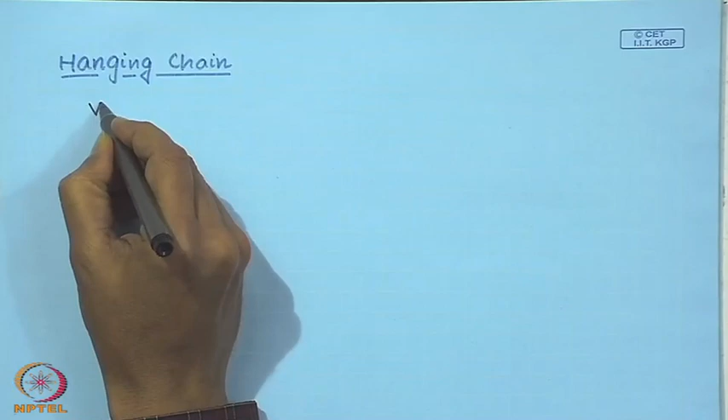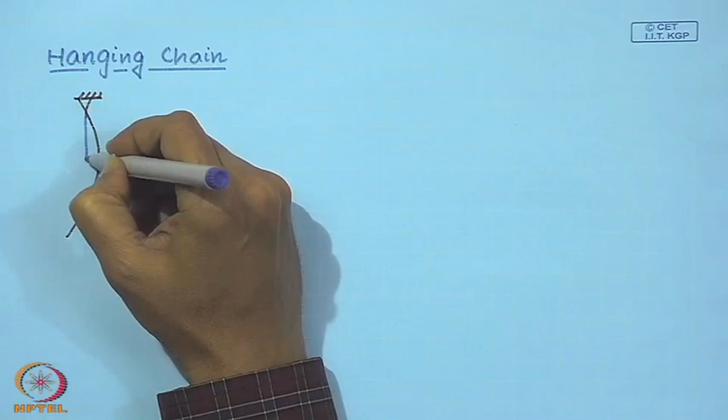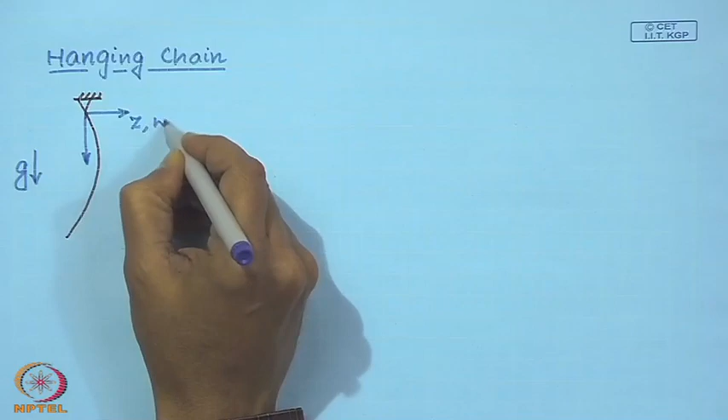So let us consider this chain hanging in a uniform gravitational field. We assume that this chain is made of a material of density rho, has a constant area of cross section A, and has a length L. Now, this is an inextensible chain.

Though it does not in a way resemble a string, which is an elastic continuum, a one dimensional elastic continuum, this is inextensible. Yet, as we will see very soon, the equation of motion, at least up to the linear order, is similar to that of a string.

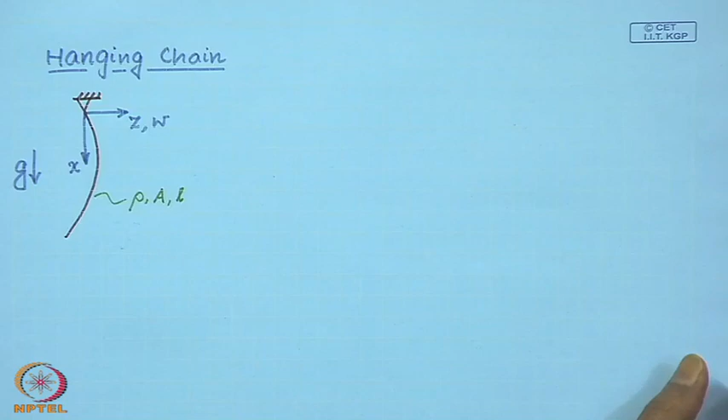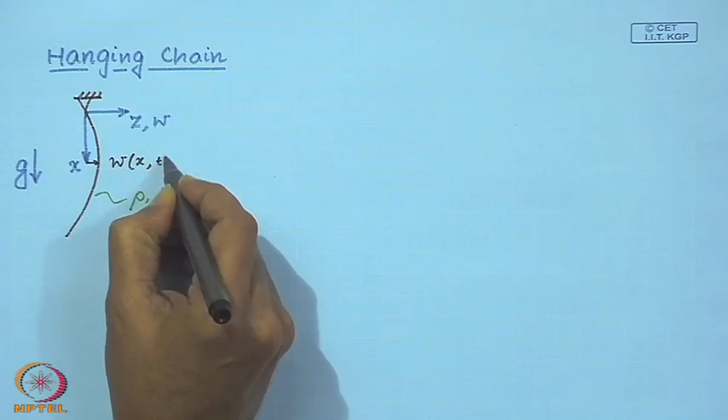So we are going to write down the energy expressions, starting with the kinetic energy. At any location x, our field variable is W(x,t). The kinetic energy of an infinitesimal element can be written as...

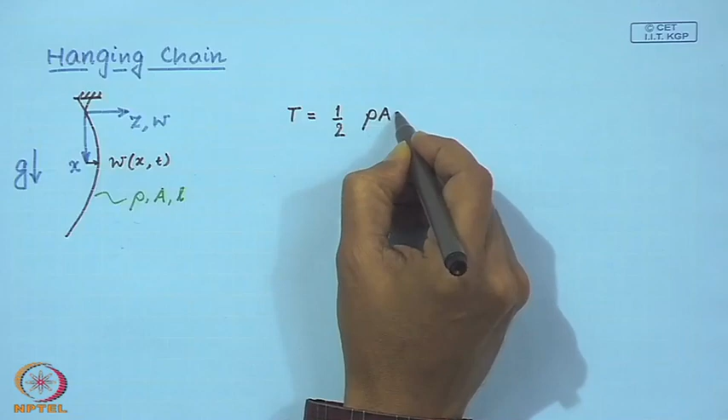half rho A dx, which is the mass of the infinitesimal element, times velocity squared. If I integrate this over the length of the string, then what I have is the kinetic energy.

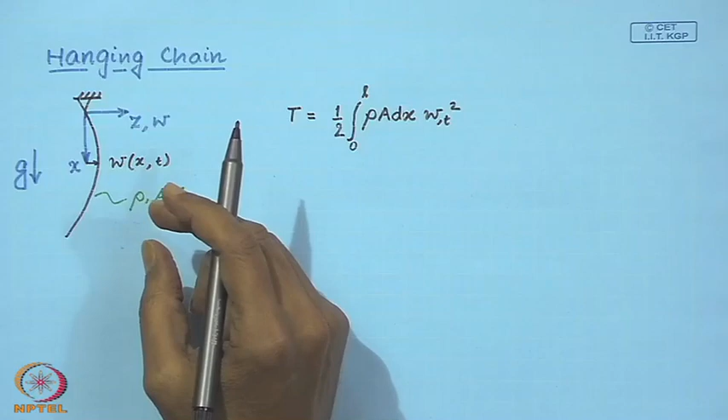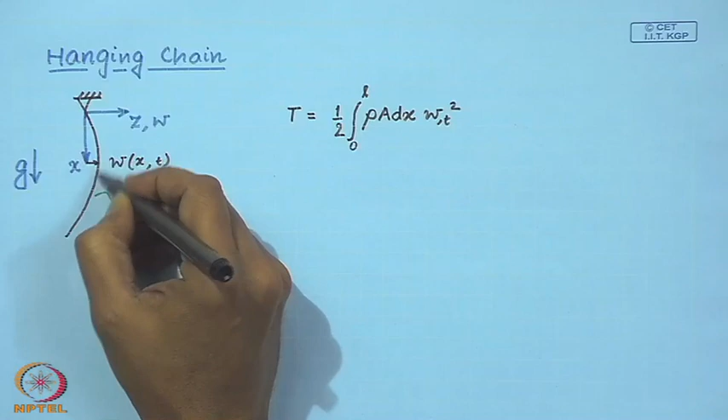Now the potential energy of this chain. Why does this chain restore back to its vertical position? It is because as it deflects or is disturbed, the potential energy of the chain changes, it increases. To calculate that, let us look at a small element of this chain.

This is the undeformed configuration of the chain, and this is the deflected configuration. This infinitesimal element had a length dx.

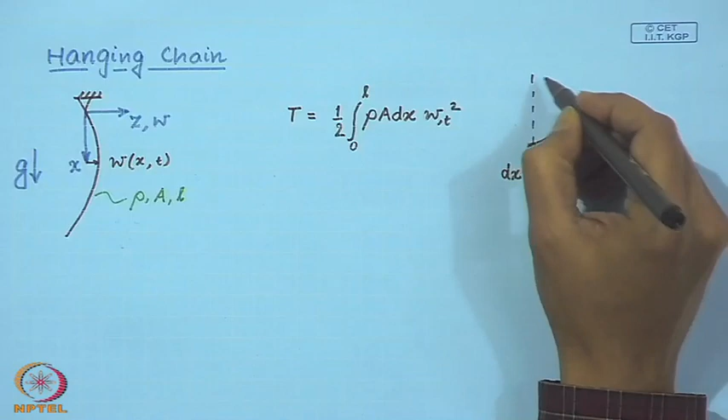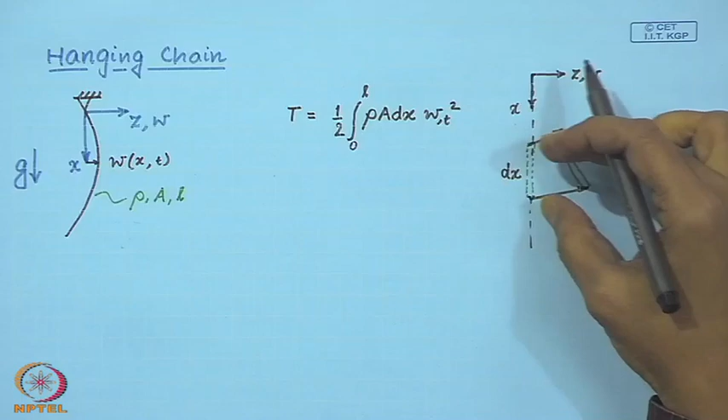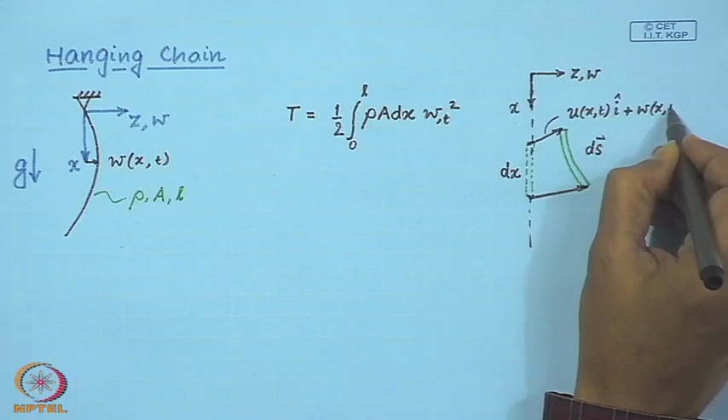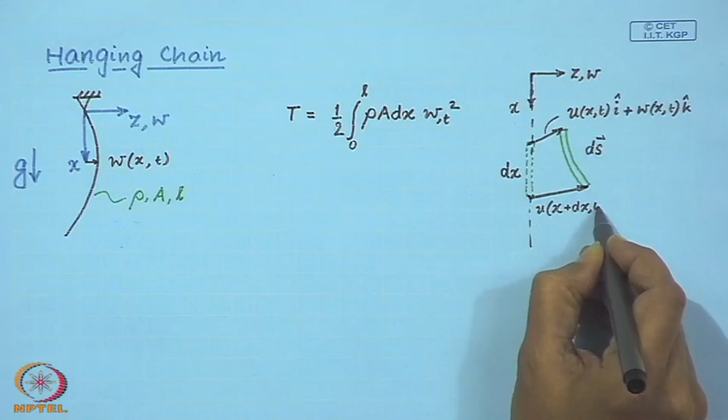Since this chain is inextensible, as we have assumed, the length of this infinitesimal element in the undeflected or equilibrium configuration is the same as in the deflected configuration. So this is also dx, but now it is deflected. I will represent it as a vector whose magnitude is dx, and these vectors I will represent this way, and this vector at x plus dx is given by this vector.

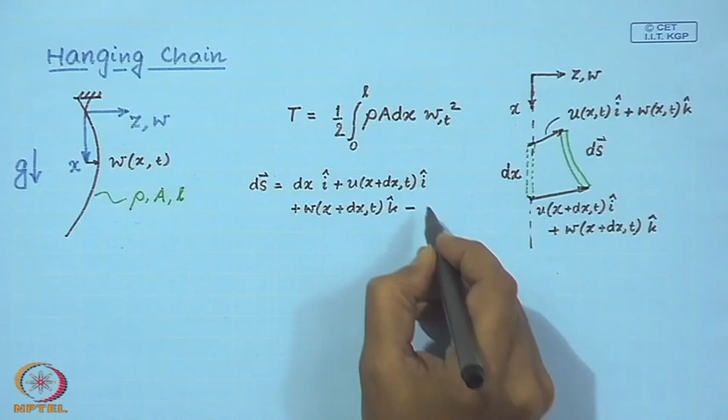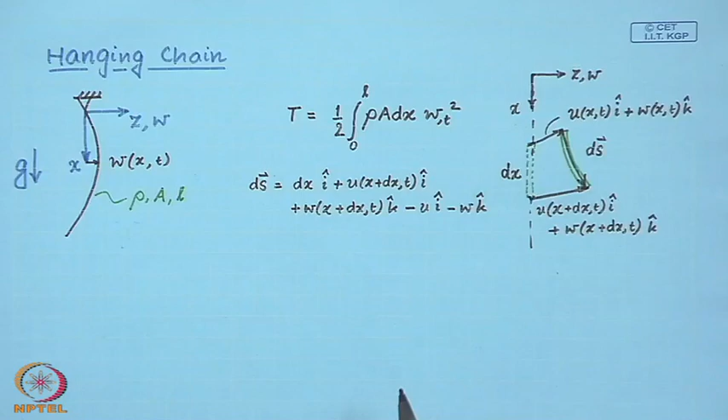So if you write out this vector equation, we can represent this ds vector in terms of the deflection of the chain.

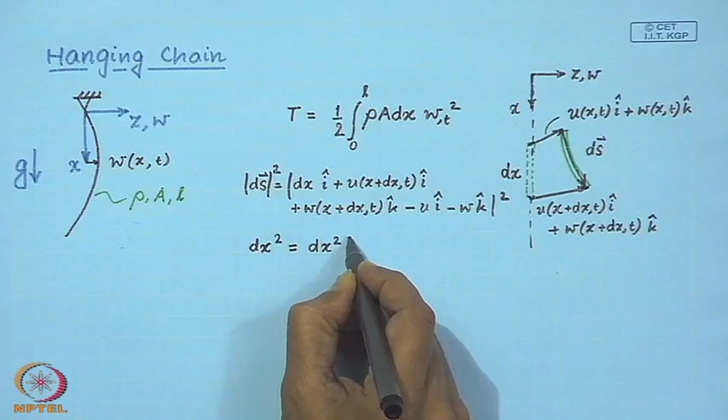Now if you take the magnitude of the vectors on both sides, as I mentioned, the magnitude of this is still dx because the chain is inextensible. So what I will do is take the magnitude squared, and if you simplify the right hand side, we have this expression, from which we can write...

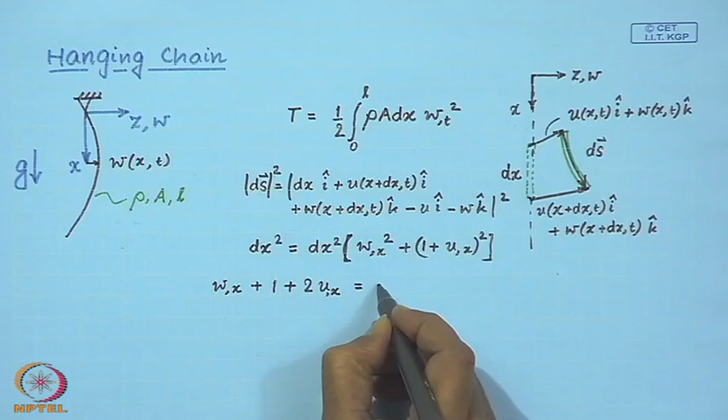Here I have made this approximation. In this step, going from this step to this step, I have made the approximation that del u del x is much smaller than 1. So in the expansion, I have dropped the del u del x whole square term. This implies...

So I have represented the axial deflection or axial motion of the chain. Now this is very different from that in strings. In strings we had neglected the axial motion, but in a hanging chain we must consider this axial motion, because that is the reason why the potential energy of the chain is changing as the chain deflects from its equilibrium position.

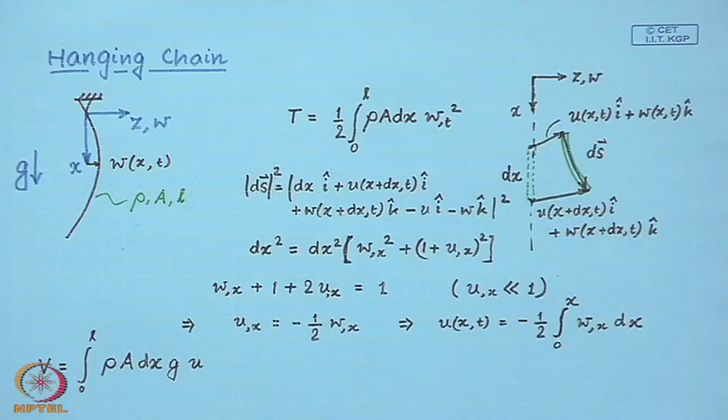Now what I can do is integrate this expression by parts. I can write this as, taking u as the first function and rho A g as the second function, so the first function times the integral of the second function, minus the integral of the derivative of the first function times the integral of the second function.

Now this simplifies to, so this boundary term can be written as u evaluated at L. So that would mean this integral with x replaced by L.

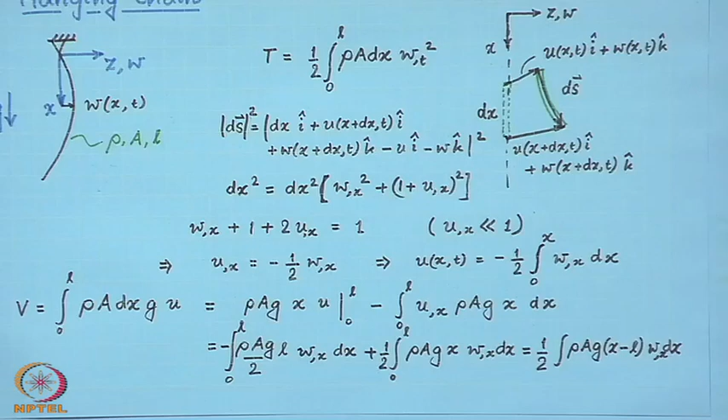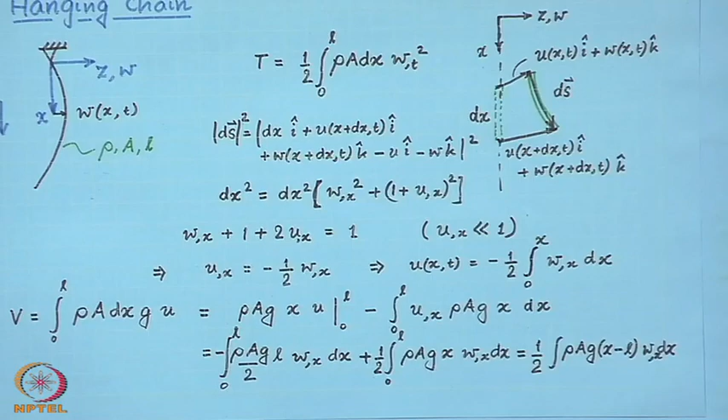So we have the kinetic and the potential energy expressions of the chain. Let me write them again.

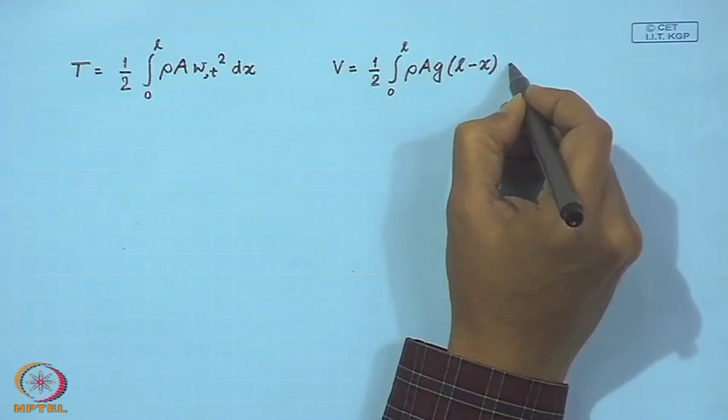If you look at these expressions, this kinetic energy expression resembles the kinetic energy of a normal elastic string, and this potential energy expression also resembles that of a string, except for this term. Now, in a normal elastic string, this term is the tension, which is constant, but in the case of a hanging string or hanging chain, the tension varies with the location. So our Lagrangian now...

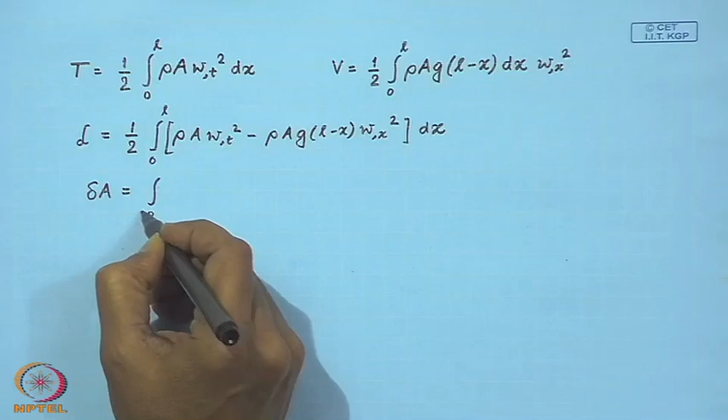...may be expressed like this, and from Hamilton's principle, which says the variation of the action is 0, we can write...

Now here, once again, as we had done before, we will integrate by parts this term with respect to time and this term with respect to space to obtain...

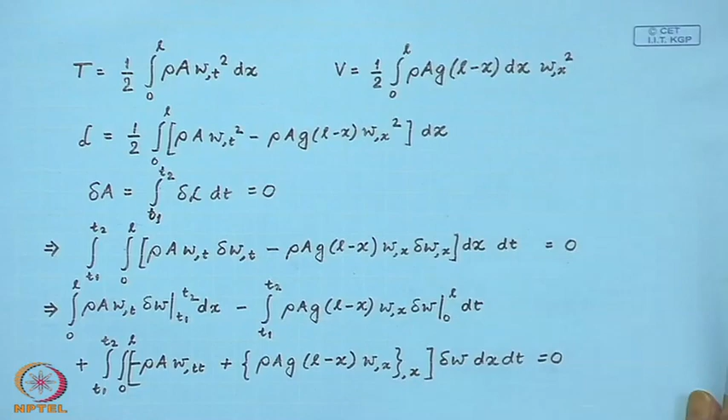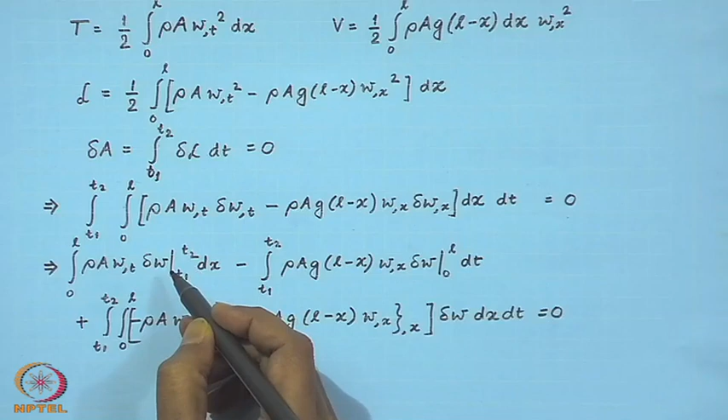So this is what we obtained finally. Now, as we had stated before, since we know the configuration of the chain at the time instants t1 and t2, there cannot be any variation of the configuration.

So this, at both times t1 and t2, this variation must vanish. Now, here is a term which is evaluated only at the boundaries, and here it is evaluated over the full domain, integrated over the complete domain 0 to L. Now, I can always hold the boundary variation fixed and change the inner portion arbitrarily, so therefore, if this sum has to vanish, they must vanish separately.

So for arbitrary variation, therefore, if this integral has to vanish, then we can write this must be 0, which is our equation of motion

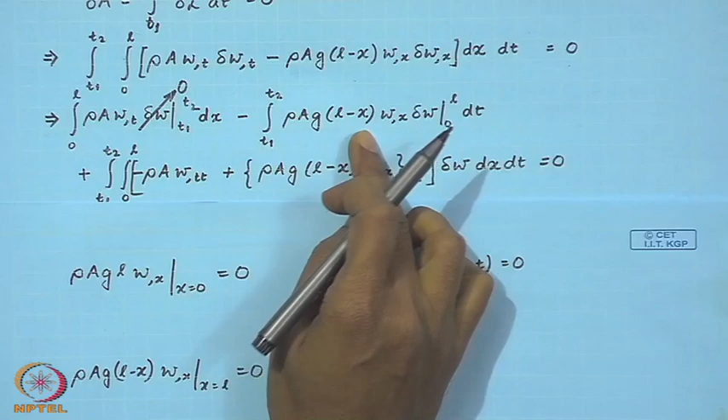Here, as you can see, at x equal to L, this term vanishes. Now, this, remember, was the tension in the string, and tension at the free end of a hanging chain is definitely 0. So, if you - this, of course, there is a product...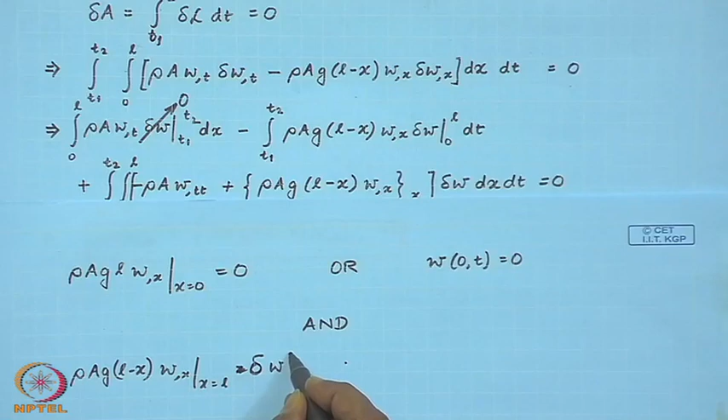Here in this case of a chain with a free end, this vanishes. Now, in order to have 0 contribution from the boundary at x equal to L, therefore, you must have this variation to be finite, because this part of the boundary term is 0 at x equal to L.

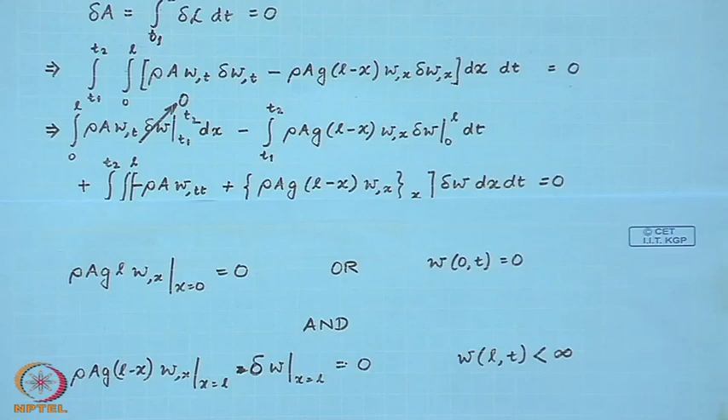So, therefore, we usually say that the deflection of the chain at the free end must be finite, and the implications of this boundary condition will be seen when we discuss the solution procedure for the hanging chain.

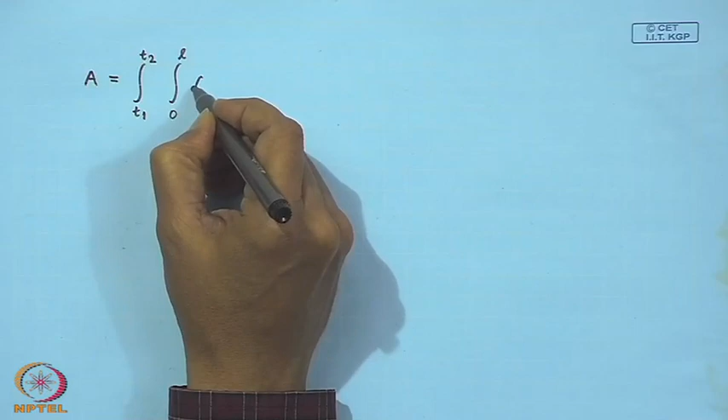Next, we are going to slightly generalize the procedure. So we have been looking at action integrals in which the Lagrangian is a function of the velocity, the slope. It may be also a function of the field variable w itself, and it may be a function of time.

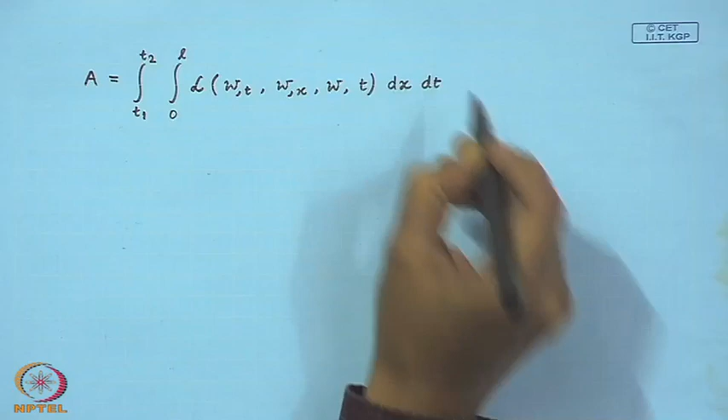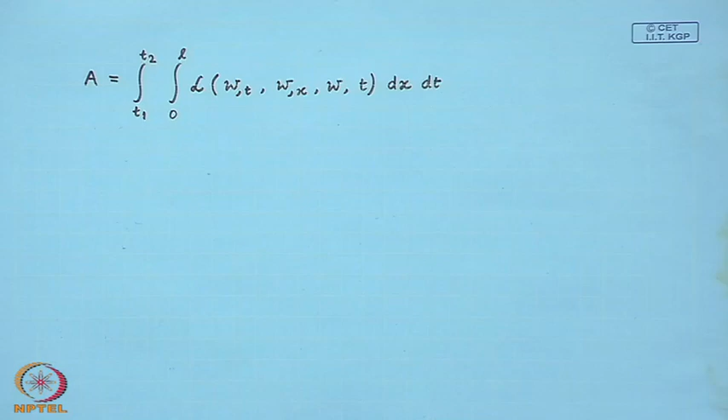So let us slightly generalize what we have been doing for a Lagrangian which has this form, which is a function of the velocity, the spatial derivative of the field variable itself, and maybe time. So if you say that the variation is 0, that would imply - so delta L may be written as...

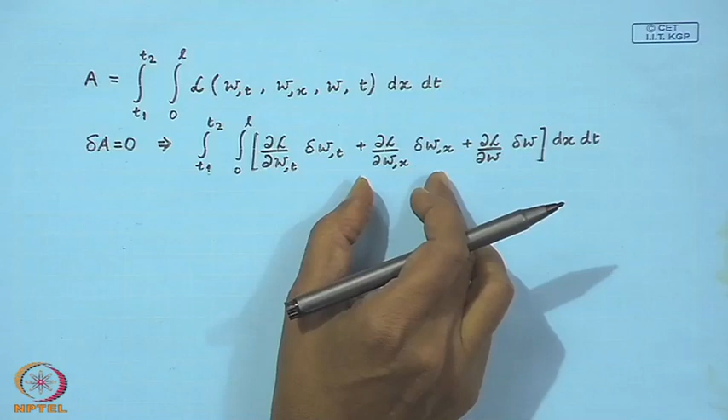...in this form. Now I will integrate by parts the first two terms in the integrand, the first term with respect to time and the second term with respect to space, and of course this must be 0. So that implies...

So here we have minus of derivative with respect to time, minus derivative with respect to x, and delta w comes out common, and that must be 0.

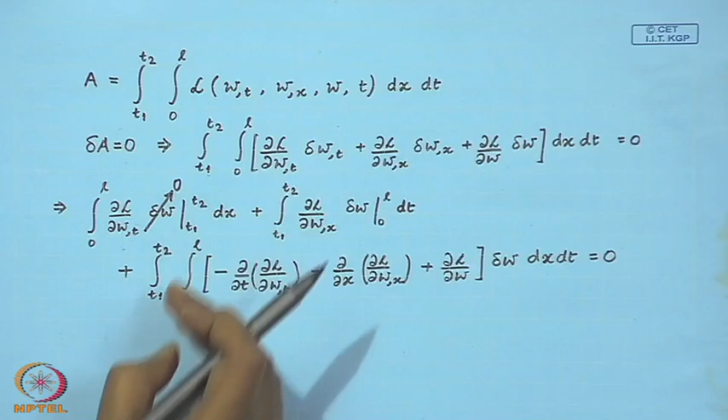Now, as you know, at these two time instants I definitely know the configuration of the system, which means I completely know my field variable. So there cannot be any variation on the field variable at these two time instants. So if the rest of the terms must vanish for arbitrary variation delta w, you see this term which is evaluated at the boundaries, and this is dependent on the total domain. Now I can fix the variation at the boundary and change the variation over the domain.

So these two terms must independently vanish for this sum to vanish. So for arbitrary variation, if this integral is to vanish, then it must be true, and this is our equation of motion.

And what we have from this term, we have the boundary conditions. So the boundary conditions, the possible boundary conditions could be: del L del W,x at x equal to 0 is 0, or W itself at 0 must be 0, and del L del W,x at x equal to L must be 0, or W at L must vanish. So these are the possible boundary conditions for the problem.

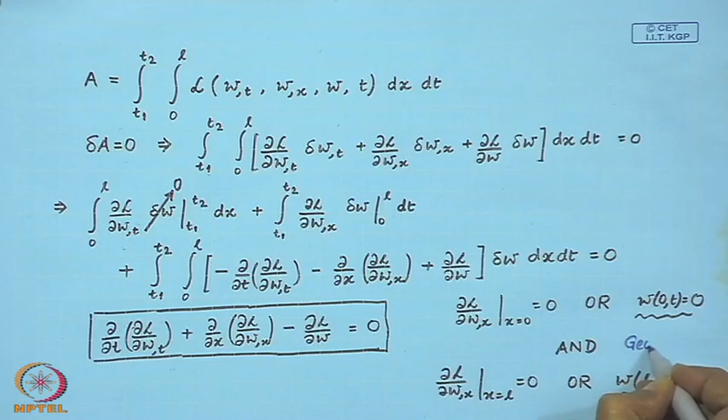Now it so happens that boundary conditions of this type are the geometric boundary conditions, while these boundary conditions are the natural boundary conditions of the problem.

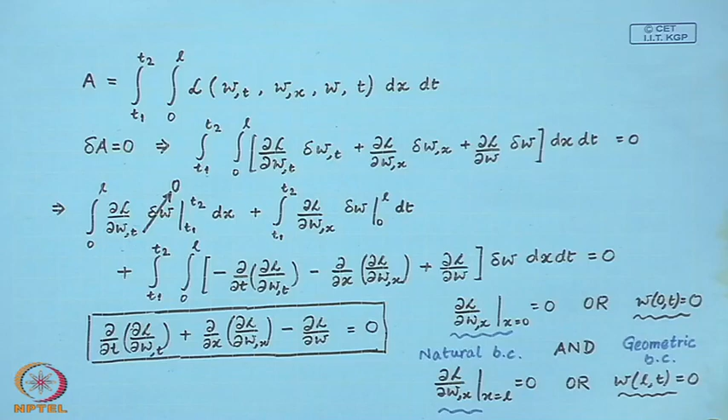So let us look at some applications of this generalized formulation for vibration of bars. So we consider first axial vibrations of a bar.

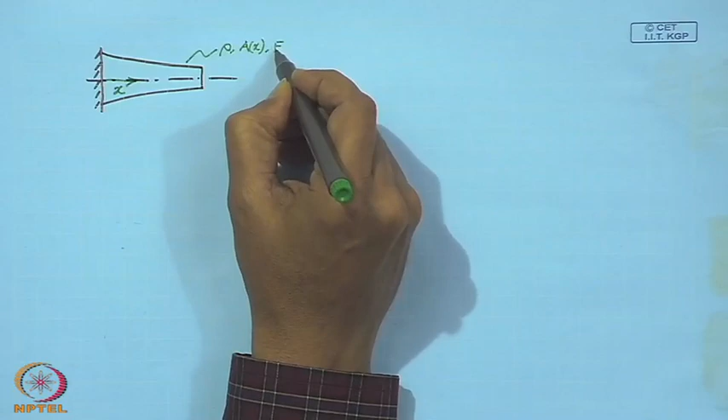So the field variable is u x comma t. So first we write down the kinetic energy.

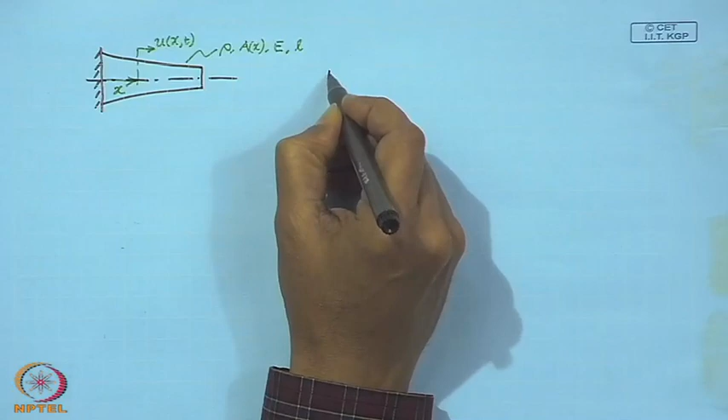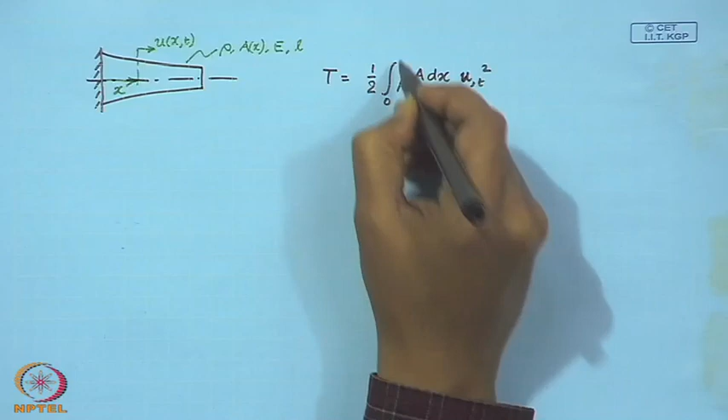So if rho is the density, A is the cross section, then this is the mass of an infinitesimal element into the velocity square, and this integrated over 0 to L will give you the kinetic energy of the bar.

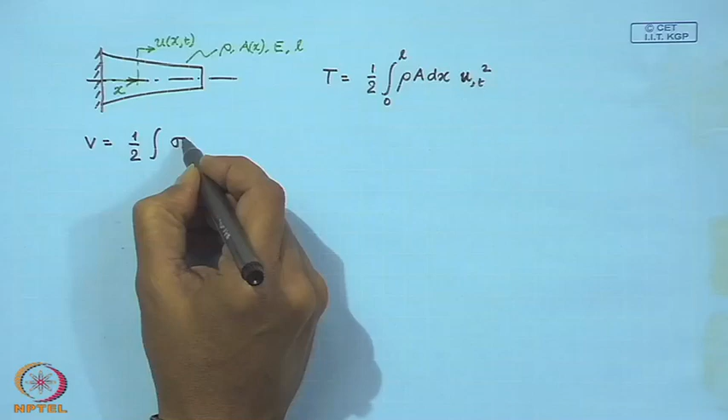Now the potential energy of the bar may be written, from elasticity theory, as half times the stress times the strain, and this is per unit volume. So I must integrate this over the volume. If A is the area of cross section, A dx is this little volume element, and this integrated from 0 to L will give us the total potential energy of the bar.

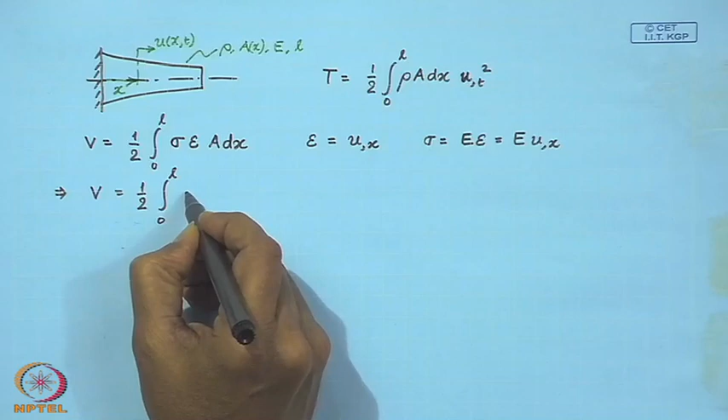Now, strain, as we have derived before, is del u del x, and sigma is... Therefore, this is the expression of the potential energy of the bar.

Now, what we have been describing as the Lagrangian, or what is more appropriately called the Lagrangian density, is given by...

Now, as derived, the equation of motion will be obtained from this equation.

Now, as you can see, there is no explicit dependence of this Lagrangian density on u, so this term here is 0. So what we have is only these two terms. So del L del u comma t is... and del L del u comma x...

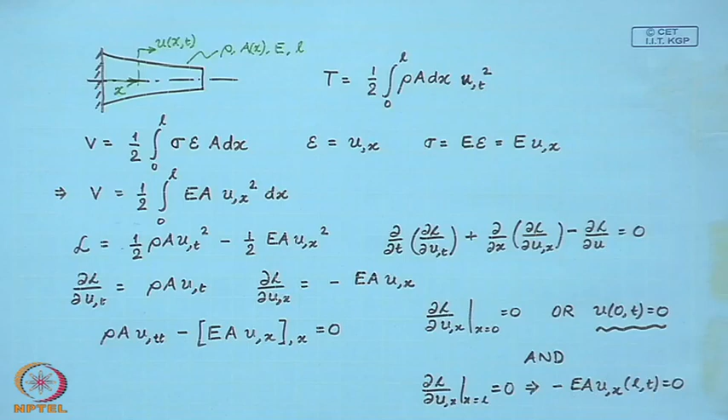There is another possibility which does not apply here. If the bar is fixed at the other end as well, then we have this boundary condition, but that does not apply here. So in our case, for this fixed-free bar, these are the boundary conditions of the problem.

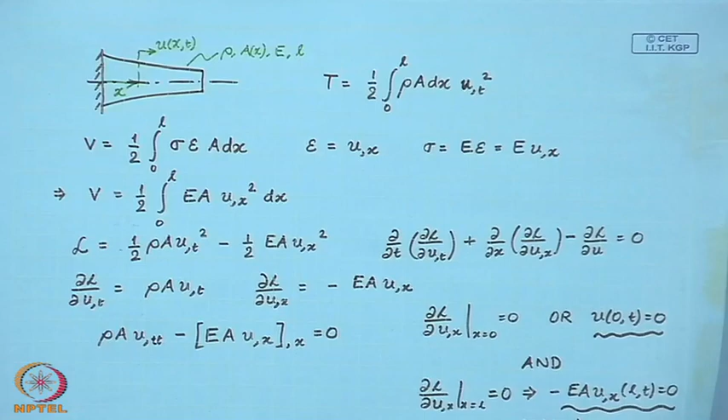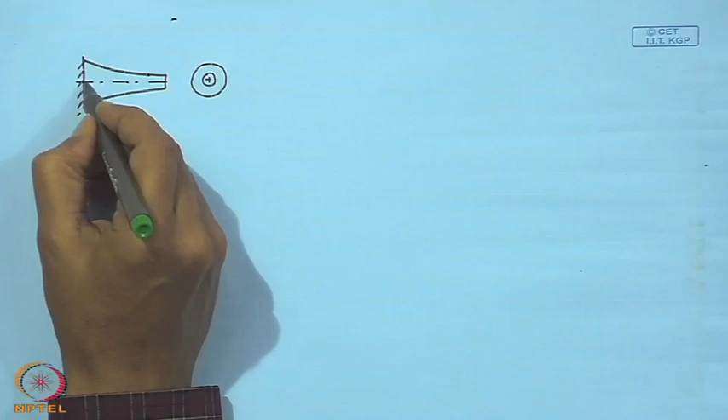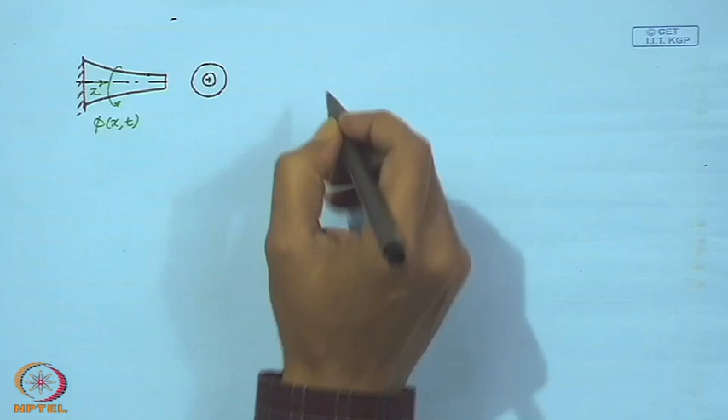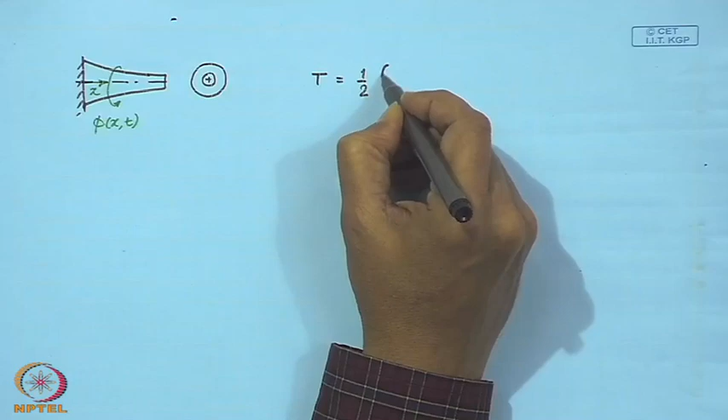Now let us discuss this for torsional vibration of a circular bar as well. So if phi is the field variable, then I can write the kinetic energy in this form.

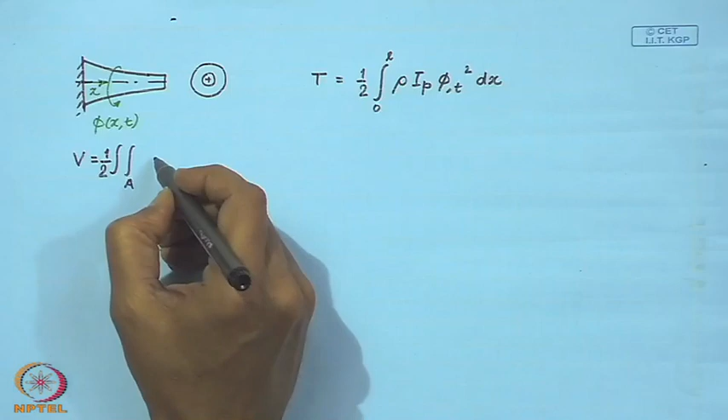Now to write the potential energy of this bar, again from theory of elasticity... Now, as we know that the shear stress is varying over the cross section, I must first integrate over the cross section and then finally over the length. So this is energy per unit volume, and that I integrate over the total volume to obtain the total potential energy.

And we know that the shear strain is given by R times del phi del x, and shear stress is G times the shear strain. So if you substitute these two expressions in here...

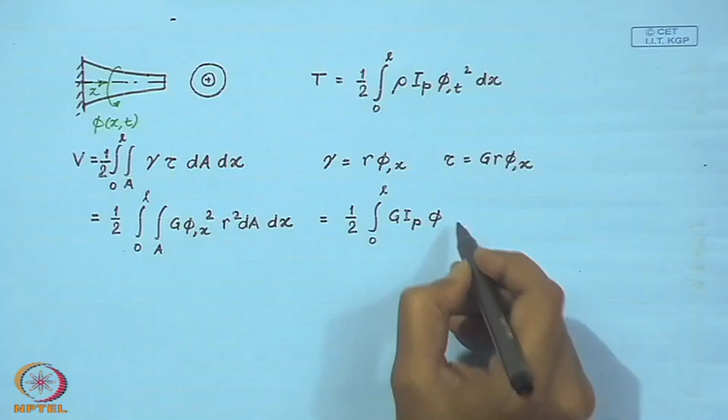This will simplify to G times I p, and this of course comes with a square. So that is the potential energy expression for this bar.

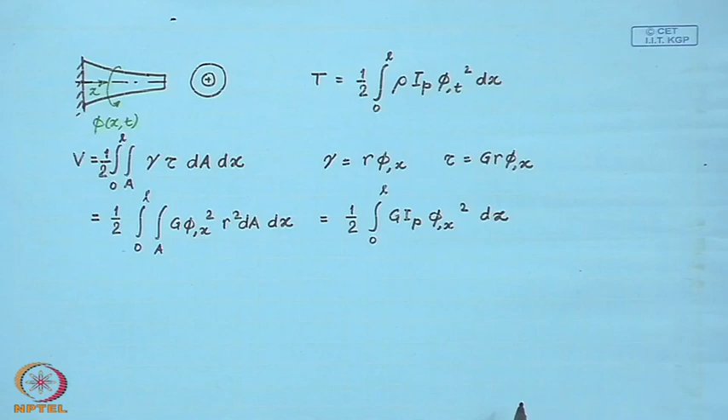So our Lagrangian density is given by this expression. Now, once again we apply our equation of motion, which reads...

Once again we find that this Lagrangian density is independent of phi, so the third term is 0. So once I have evaluated these terms, I can now write down the equation of motion.

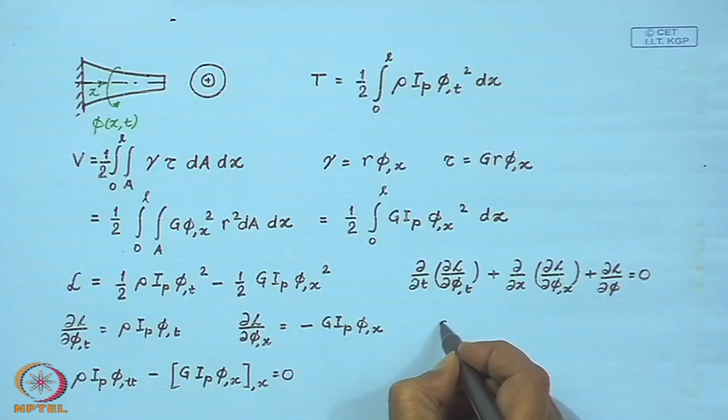In this form, and the boundary conditions are obtained as: at x equal to 0, since this bar is fixed to the wall, there is no twist in the bar, and at x equal to L, this is a free end, so phi is not fixed.

So this term must be 0, which implies... so these are our boundary conditions for the problem. This is a natural boundary, this is a geometric boundary condition, and this is a natural boundary condition.

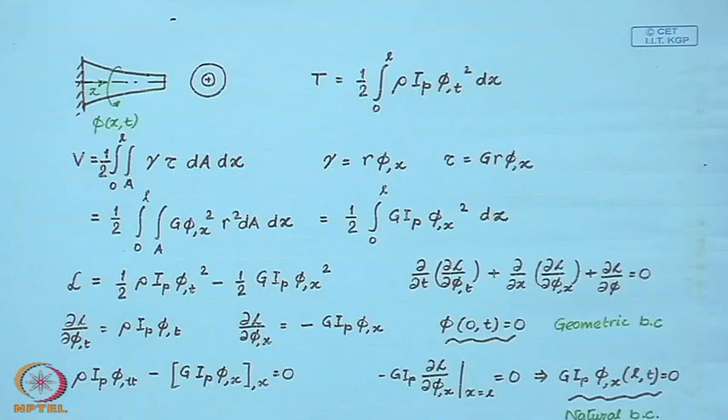So, what we have looked at in this lecture: we started with the dynamics of a hanging chain, derived the equation of motion and boundary conditions, then generalized the variational approach to finding the equation of motion and boundary conditions. We derived a general form and applied it to two examples. We will carry this forward and see applications in other examples in subsequent lectures. That is the end of this lecture.